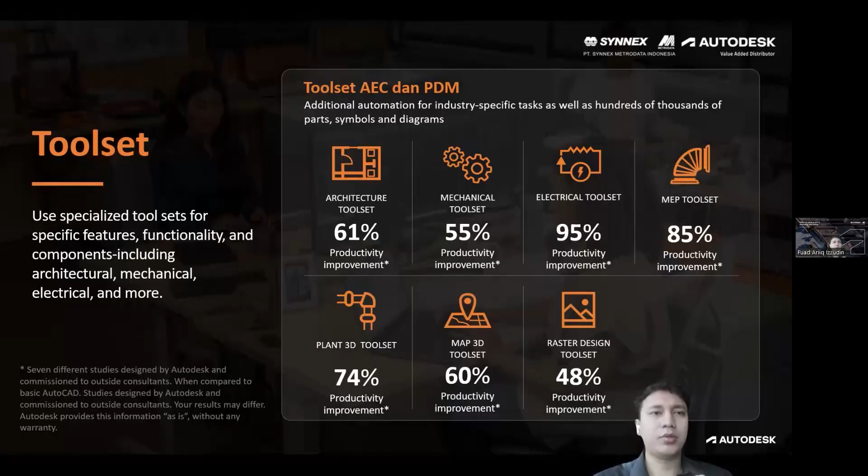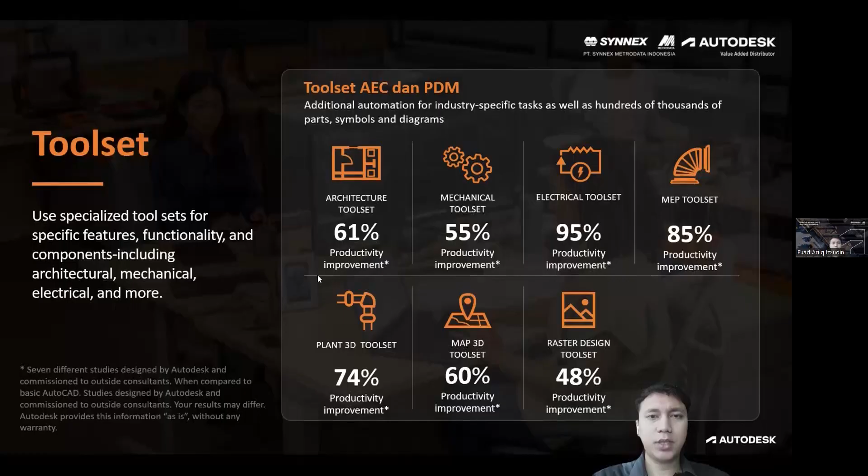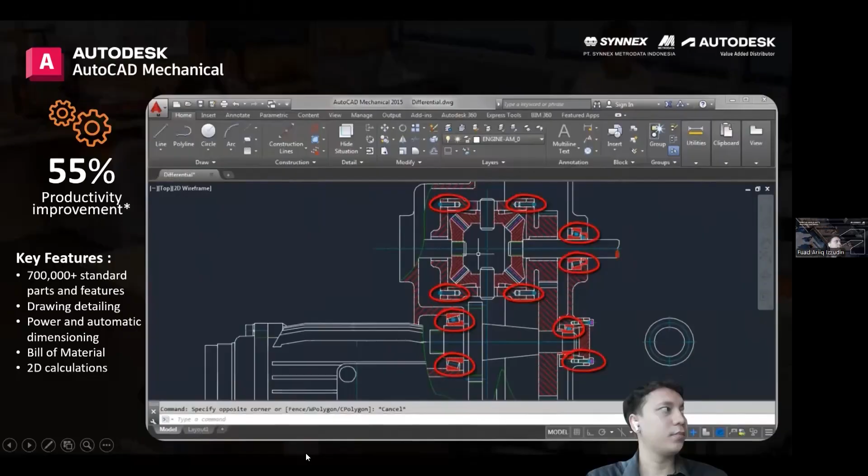Is to work with content libraries. Most drawings, just like this differential, are full of standard parts. Now imagine you had to draw them all by yourself. But with AutoCAD Mechanical, you don't have to worry about that. In the content libraries, you can choose from over 700,000 pre-drawn standard parts and features. Now let's see how to work with them.

First, I want to insert a roller bearing here. Libraries for frequently used standard parts, like roller bearings, have shortcut buttons. You can search for your part, browse through the folders, or navigate by clicking on the images, just as you like it best.

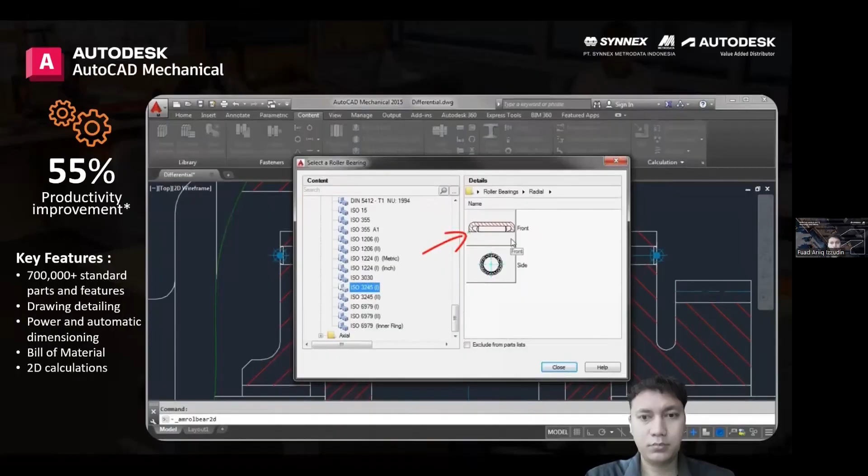I pick this needle roller bearing and select the front view. By the way, can you see the little green cross in the image? This point will be congruent with the insertion point. You'll find a cross like that for all parts in the content libraries.

I go on and pick the insertion point on the shaft contour, followed by the center line of the shaft. Then I use the dimension of the shaft to specify the inner diameter, the outer diameter, and the width. One final click to place.